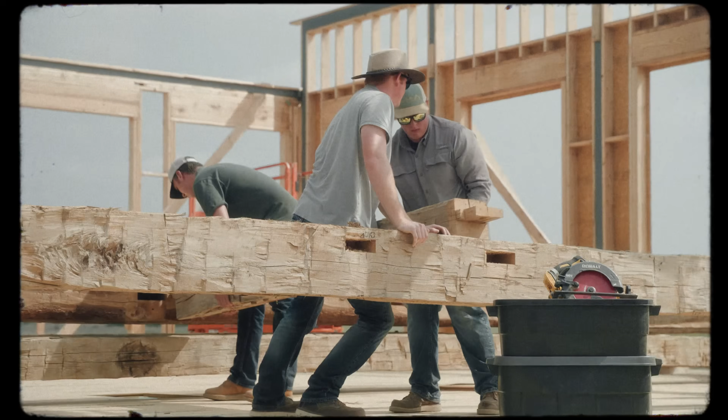Welcome back to New House, Old Soul. We're talking about framing today and the history of how some of these things are put together. Maybe you'll see this on some of your builds, and then how to build quality again today.

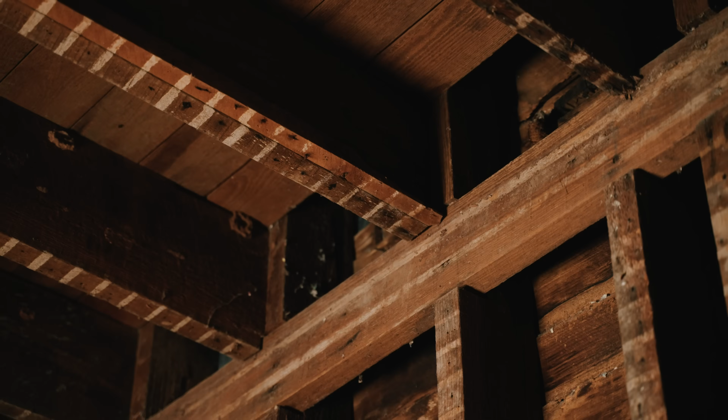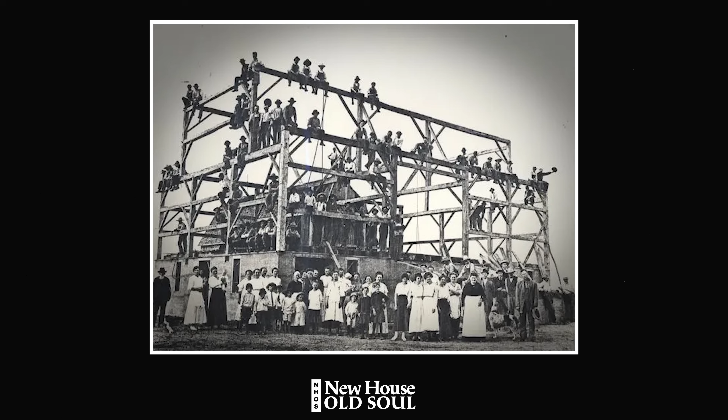Okay, so talking about framing, how to think about it. Essentially, we've got three types of framing. There's the early timber framing, which lasts from the earliest periods in America, 1640 to 1740. I suppose there's one earlier, log cabin, right? A log cabin would be a different type of framing. We actually have both at the barn project, we'll go out and check that out. But timber framing is, let's just say 1700 to 1840.

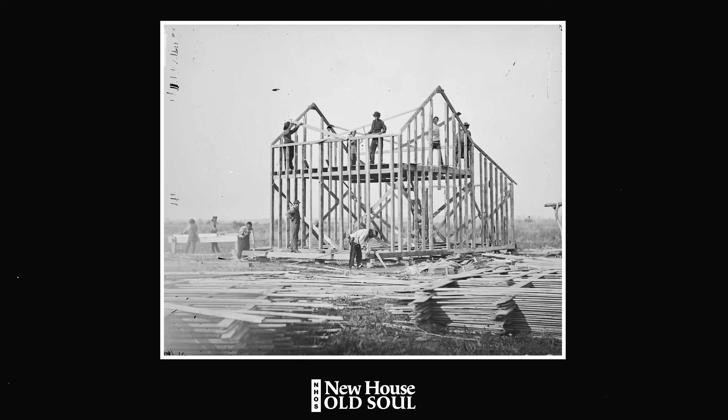Really right around this period of time, 1840, things start to begin to change. The next type of framing is called balloon framing. Balloon framing is from 1840 to 1920, and then you've got Western framing or deck framing, which starts around 1920 to today.

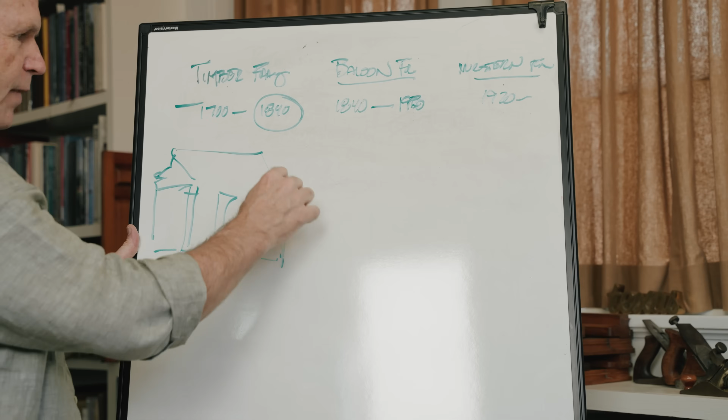So timber framing is essentially, the pieces that are going to hold the house together are large timbers, and they were made into bents. Essentially, you'd make a frame here, and this would be called one bent. You would lean this up and then tie it together with a girt that went across, and these bents would be held together.

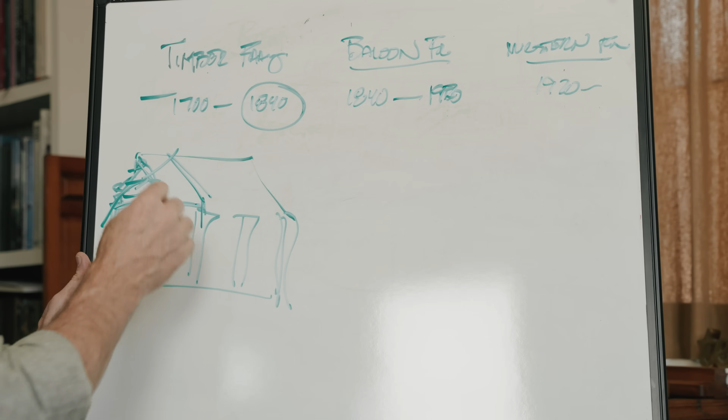And so you saw this when the barn was going up, that they actually built these bents and then craned them into place, and then they tied it together and kind of locked this thing together. But the timbers are probably average 8 by 8, sometimes 10 by 10. There's a massive summer beam out there that's like 20 by 12, it's huge. This is the way timber frame was put together.

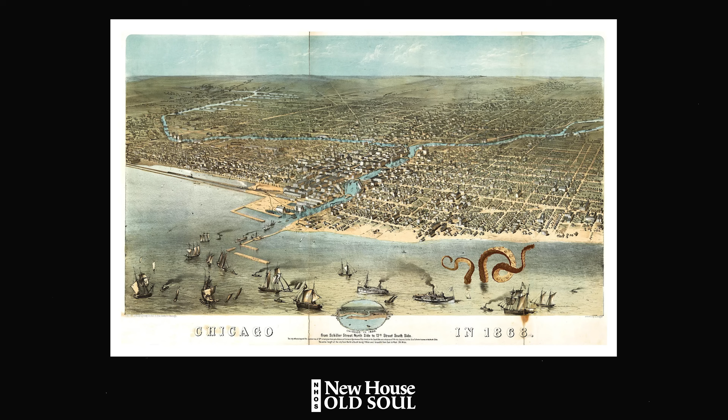As Western expansion took place, as we were growing very fast, the number of timber framers moving west - Chicago was right around this time period, 1800, 1820, 1840. You have the Erie Canal in 1820, 1830, so Chicago's really growing very fast. It's growing so fast, and there's so many immigrants coming in that there's not enough skilled labor to build the timber frames, and so they start to put houses together in a different way.

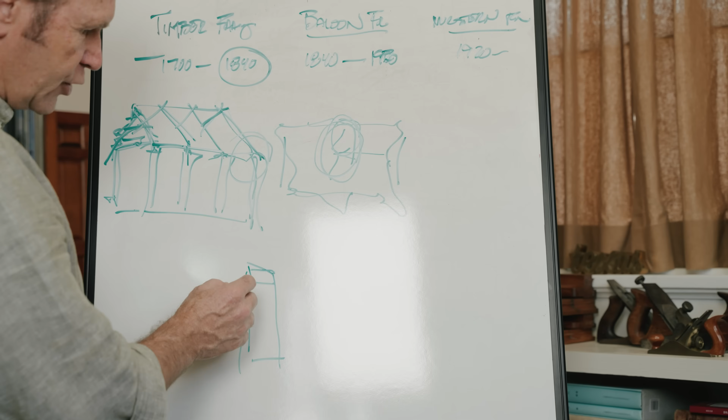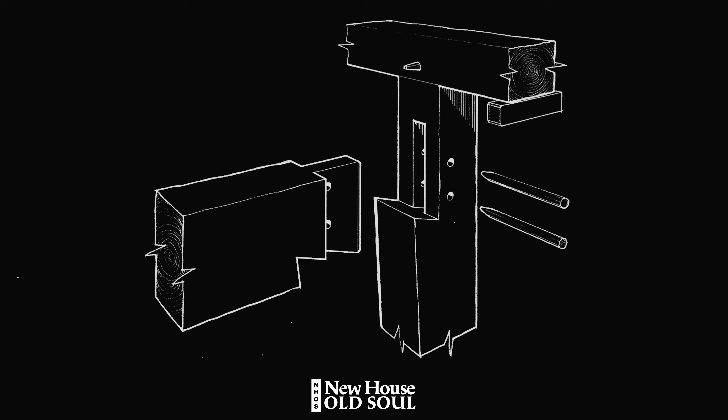If I look at this timber frame, you would have a mortise that goes inside here - the mortise is the inside piece - and then you'd have another piece with a tenon, and the tenon would slide into that mortise, and then it would get pegged. This mortise and tenon joinery for timber framing was almost like building furniture, crafting these houses, and then you'd have a brace that locked everything together. Then when you sheathed the house, it kind of got some structural rigidity.

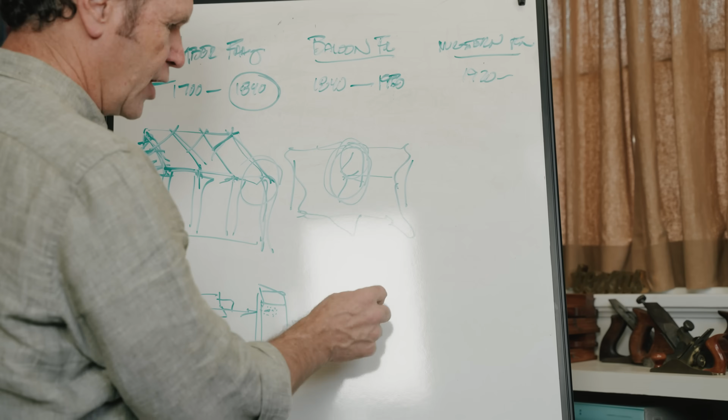In this case, with balloon framing, you're basically taking a stud and a plate and nailing it together. The skill level to do this was much lower, obviously, than building a timber frame. The whole idea of a balloon frame was a derogatory term, meaning it looks like a balloon, it's going to blow away. Out of necessity, it really grows and becomes the dominant form of building.

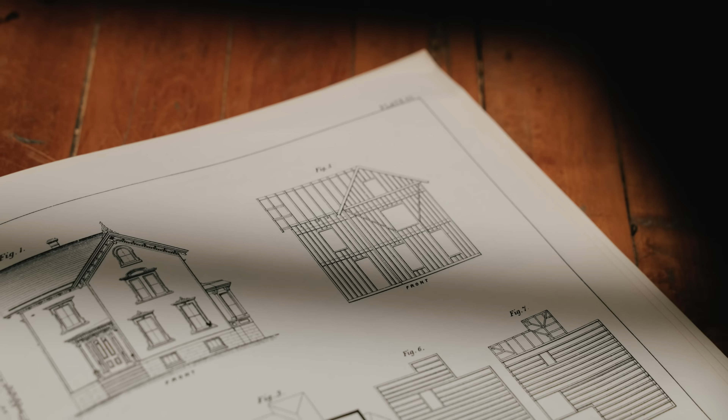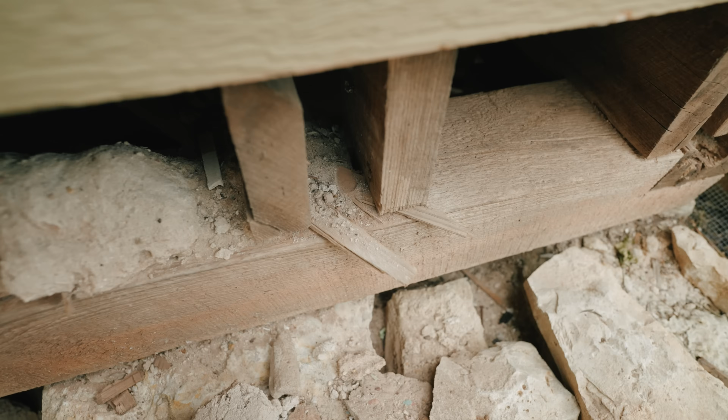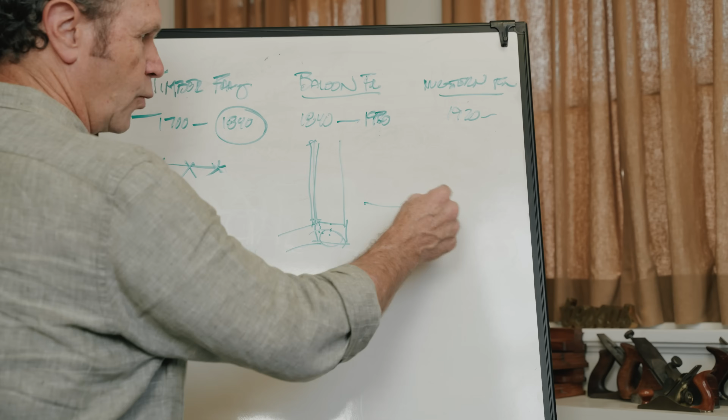Now, if you look at the catalogs for how they were put together, the balloon frame takes a bit of a hybrid from the timber frame, because what you'll see is there's a big timber plate on the bottom, and these studs go down and are actually mortised into that beam. Where did they get that? Why would they mortise into it? Because they come from a timber framing background. So it wasn't a complete 2x4 plate, 2x4 header, and everything nailed together - it evolved over time. By the time we get to Western framing in the 1920s, the big timbered plate at the bottom has kind of gone away.

Sometimes I'll hear people talk about going into an old house and they say there's no headers over the windows and doors. I can't believe these guys built so cheaply and so badly. Well, in truth, that's the way it was planned and that's the way it was laid out.

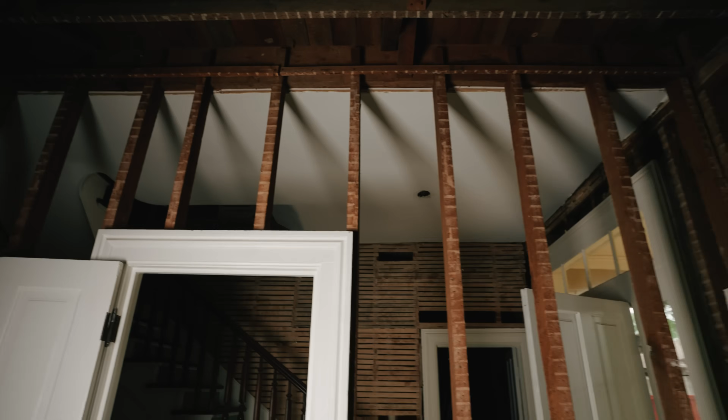If I look at these framing plans, this is an 1870s book, a pattern book from Bicknell and Comstock. Basically what they're showing is this house framed right here, so they're showing the stick framing that's happening. If you zoom in and look, there are no headers over those windows, okay?

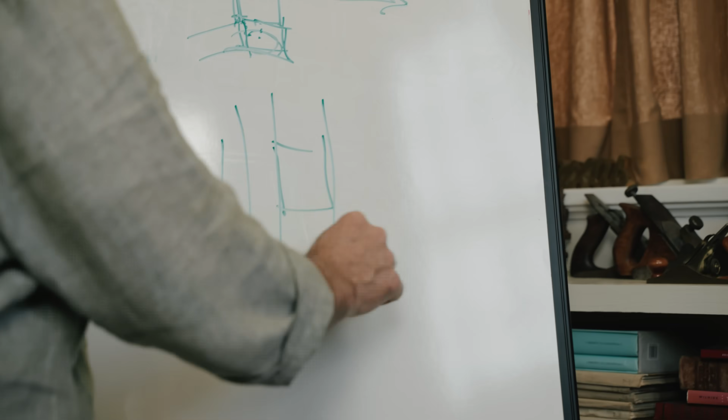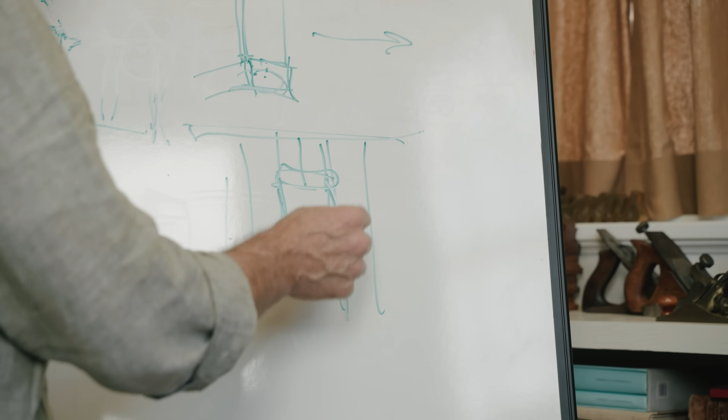And so if I have an opening and everything's stick framed, right? They did not build a header to span this opening. There are no cripples, there's no king studs and jack studs or anything in here. They just ran their studs right across. They stuck a window in that opening and they didn't worry about building any kind of a header like that.

We would do today. When you look at houses and realize they did that, sometimes there's a sag that takes place, especially in bungalows from the 20s, where you get a window that's 6 or 8 feet wide and no header—you actually do get some sags.

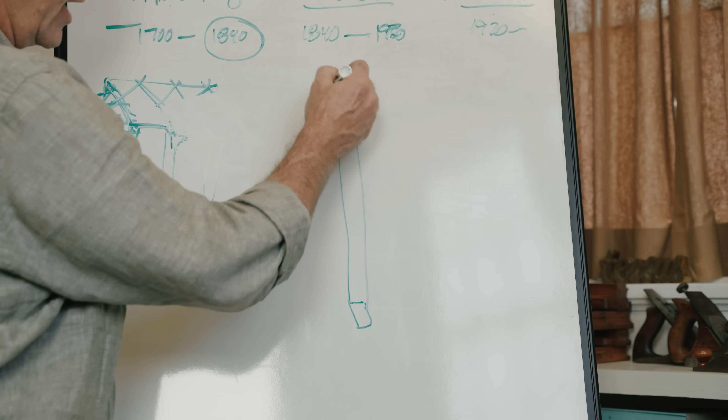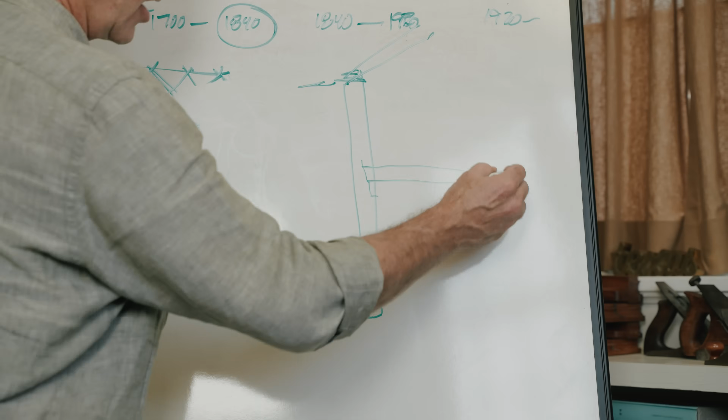How did they hang the first floor? What did they do? They actually put in a ribbon band or a girt that was notched into the wood, and then their floor joists actually sat on top of that ribbon band, okay? They didn't really fall apart, but it does seem precarious the way they kind of locked these houses together.

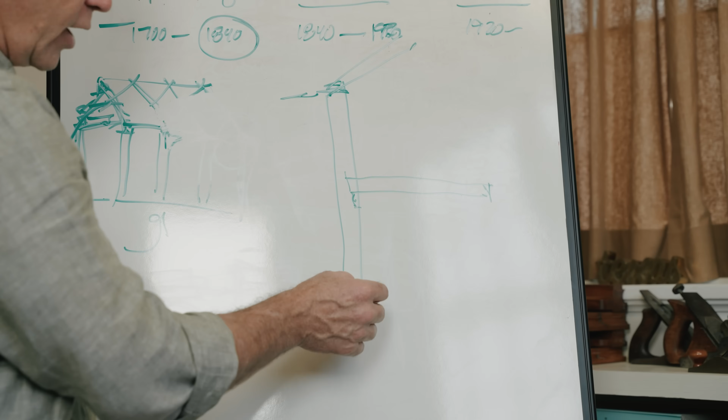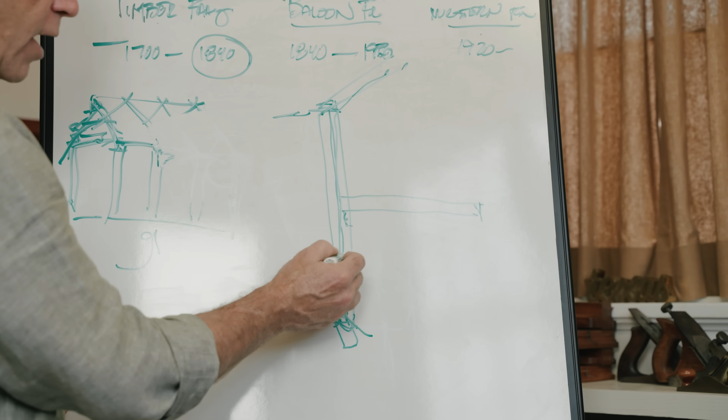The problem is that in this cavity, there's nothing stopping the airflow that goes between here—airflow or fire, right? If there's a fire in the basement, it runs right up the inside of the walls, goes right into the attic, and the house burns down very quick. So the whole idea of putting fire blocking in on these levels, every 6 feet or whatever it was, was to keep fire from running up the walls and burning these houses down so quick.

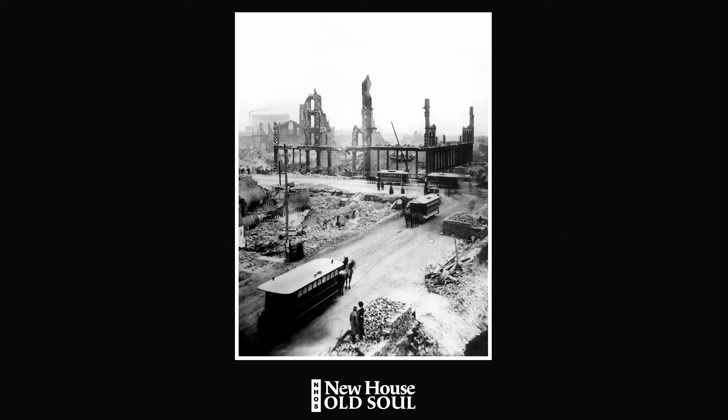Remember the Great Fire of San Francisco, the Great Fire of Chicago—the city went up in flames so fast, part of it was because of no fire blocking and balloon framing. There is another problem with this, and that's the way the wood expands and contracts, but mostly it was fire that was causing the problems and causing the change.

And so again, if you remember our map of the United States, in 1840, 1850, they're discovering balloon framing out here; by 1900, 1920, they're doing Western framing out here. This is because the migration is going west so fast. We've got the frontier out here, so you have a lot more building and a lot more fast construction going on.

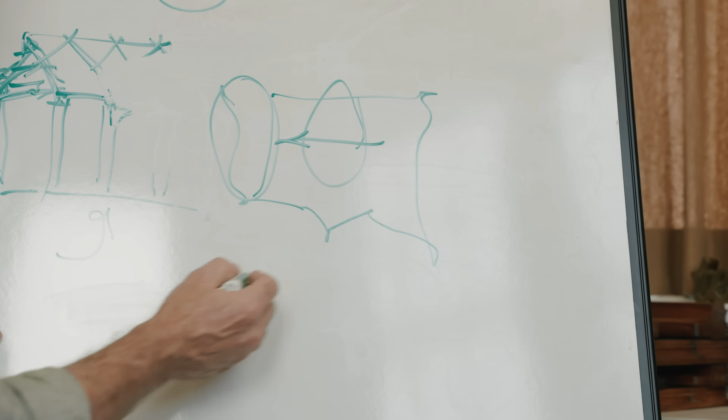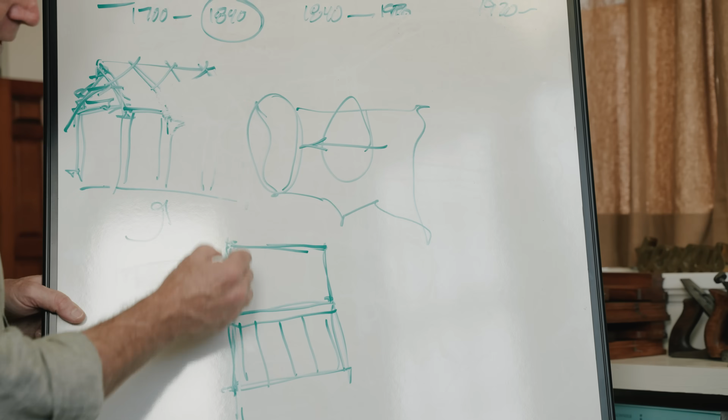And so when you get into Western framing or deck framing, essentially what happens is I do not build a stud that goes all the way up the wall like this. Instead, what I'm doing is building a first floor, putting my joists in, decking it, building my second floor right up on top of that first floor. This is called Western framing when they changed their building methods.

So instead of having floor joists that hang onto that ribbon band, they instead decked this out. That stopped the fire problems, that stopped movement problems, because one of the other problems was the expansion and contraction that balloon framing caused.

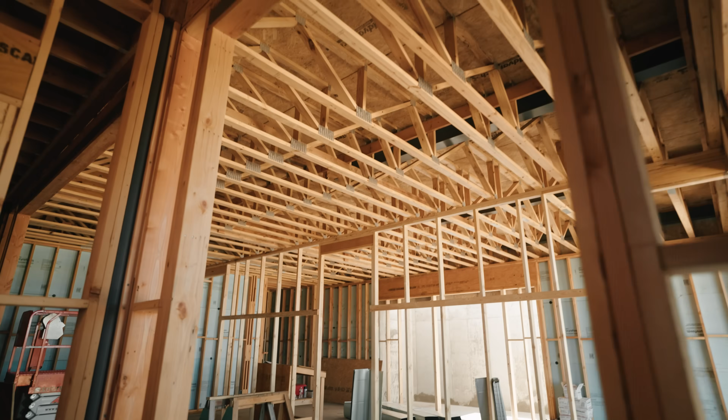So here's your history of framing. We are now in this Western framing world. This is how we build houses today. This is what is code. This is how we got there. If we're going to build a new house with an old soul, what do we do, right?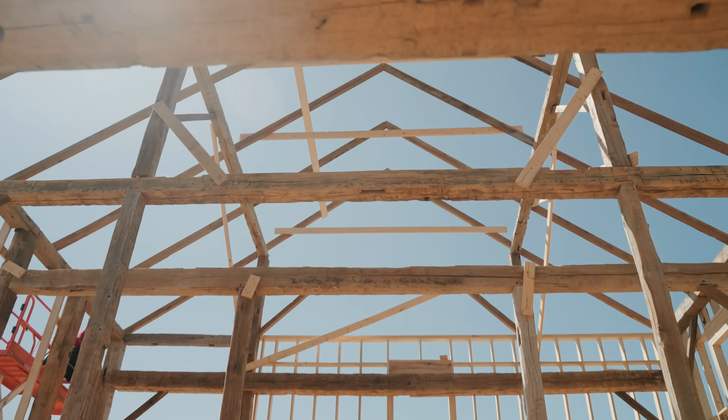Are we taking anything from this balloon framing tradition and applying it to new houses? Not really, but we are taking this timber framing tradition and applying it all the time. There are businesses taking down old barns, restoring them and putting them back together. We've got a project going just like that. I want to take you out there and show you the magic of these old timber frames, why they're so fun to live in, and why they take us back to a different place in time. This project has a log cabin, some timber frame, and some new framing—a great project with a lot of history and old soul things applied to this new house.

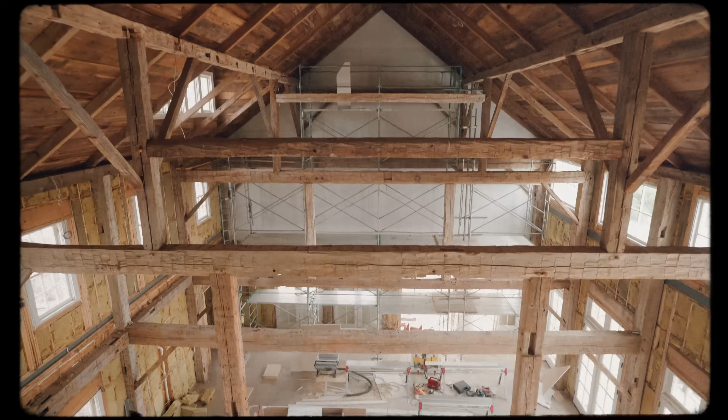How do you get a new house with an old soul? Part of it is taking that story and the narrative of framing, especially log cabin and timber framing, because those huge timbers are things we're not used to seeing. They evoke an age, they evoke a story, a narrative that we keep talking about. It's like, ooh, when did that happen? What's the story behind that? Why did they do that? Why is that there?

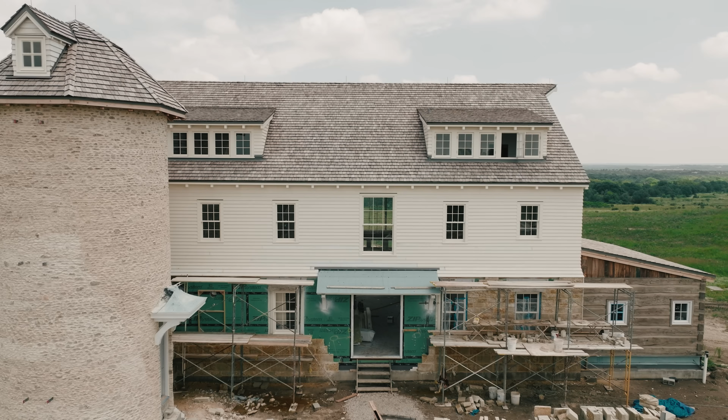So this cabin, right? We've got two stories here. We've actually built a log cabin—there wasn't an original one. We've fabricated this story, where originally there's a barn, or the first structure on this property was a log cabin. Later it got added a timber frame, which is what's inside. That's the story and the background of this house. So when you drive up, you see the silo, you see the framing, and immediately you go, where am I? What's going on? What's the story behind this?

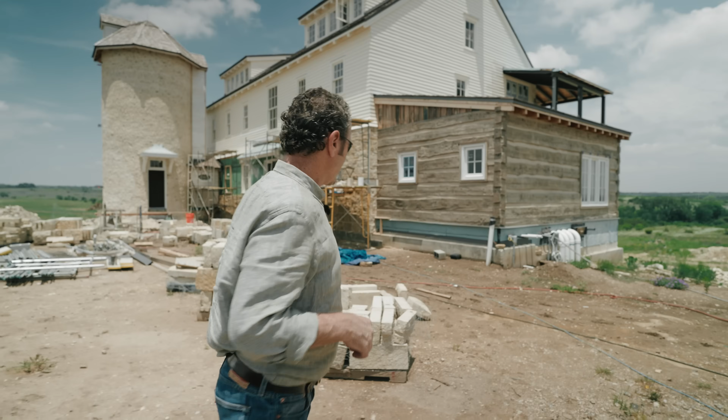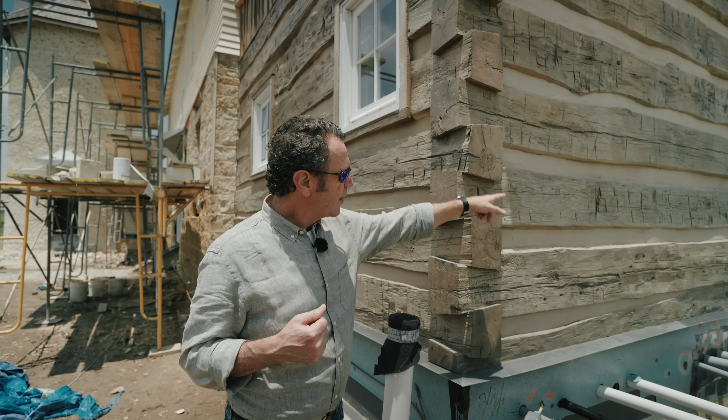So the earliest type of framing is, of course, log cabin framing. Now when you get into log cabin framing, are you just going to stick logs on top of each other? No, we're actually using historic building techniques and historic timbers to evoke the right feel and the right age. These are antique timbers, okay? So the antique gives us the hand-hewn marks—we see the axe marks, we see the age right there of how these were made.

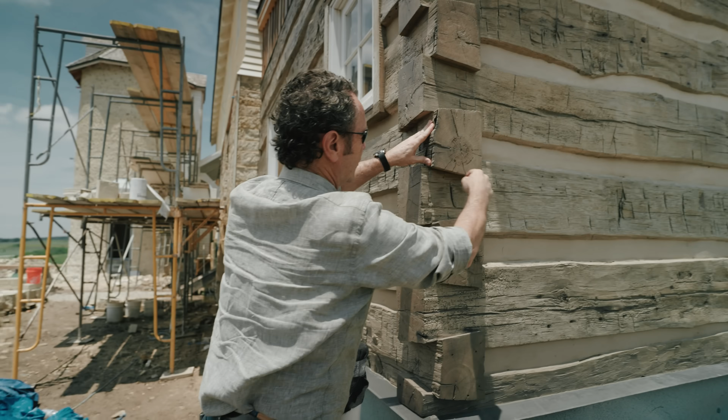This is a dovetailed corner. You can see each of these is a dovetail—it's bigger on this end than it is on this end. It keeps it from pulling away, right? That locks it in. This timber is locked in between these two. That dovetailed corner, the reason they did that is so it didn't fall apart. The roof naturally puts weight on it, and it would want to push things out. The dovetail corner stops that.

The great thing about antique timber is that it lasts so long. We've got really tight growth rings, we've got a lot of heartwood, so we've got timbers that not only look really cool but will last a long time. The next stage after log cabin is timber framing. Let's go inside and I'll show you that timber frame barn.

This is timbers, right? It's called timber framing because it's framed from timbers. The bents I was talking about—this comes in sections. There's a bent section, here's a bent section. This whole roof and triangle and everything are all pegged together. You can see the large pegs and the mortise, which shows you there's true mortise and tenon joinery, the way this is all locked together.

So essentially what happened, the way this barn was put together—it was dismantled in New York, taken down. They would have taken out all the mortise and tenons, pulled all the things, documented it, marked each little piece with a map. They would have drawn out on a plan, hey, this is where this number goes, this is where this board goes, this is where this board goes. So the whole thing would have been documented and taken down.

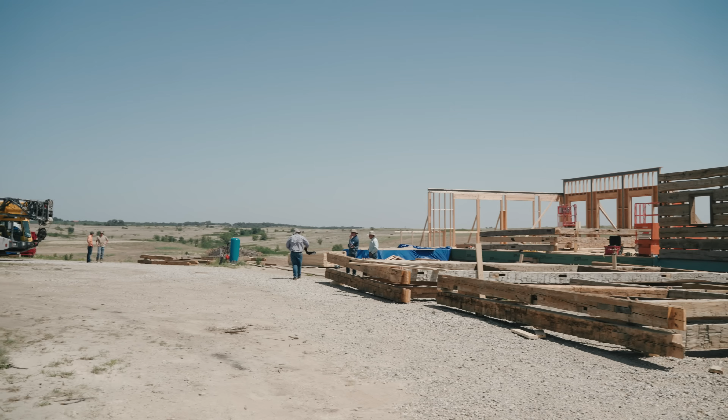It was actually taken to Montana, where this company has a huge yard, and they reassemble and rebuild these things. If one of these beams was rotted or something happened to it, they would replace it. So they essentially reconstruct this thing, put it on a truck, drive it down here, and they actually picked it up with a crane.

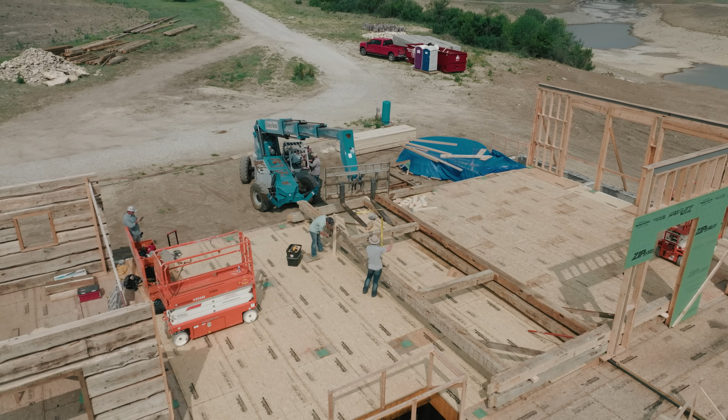So they prebuilt these bents, pick them up with the crane, and come and drop them in place. We already had our foundation, our base ready for them to come set it down, and then these cross pieces are the ones that tie it together. They bring a big bent in, and then lock it together with these girt pieces that come and tie it across. You can see the bracing, you can see all these pieces as it's all tied together.

So we start at one end, the bents are all laid up, and then it's all put together. It can be put together in about a day, so it's pretty quick.

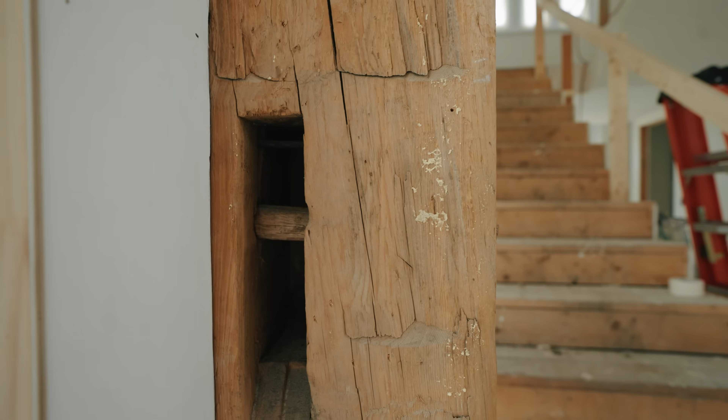This is that massive beam I was talking about. It's called a summer beam. There's a hole in it as if this was part of a mill or something that was spinning, something that was going on in here. Look at this right here — here's my mortise, the tenon fits in here. I've got an old peg that's still sitting inside there. So here's our joinery coming together.

So now we are using the past, using a historic piece of fabric to communicate a story and a narrative. We're using framing to help create that story, to help us tell that story.

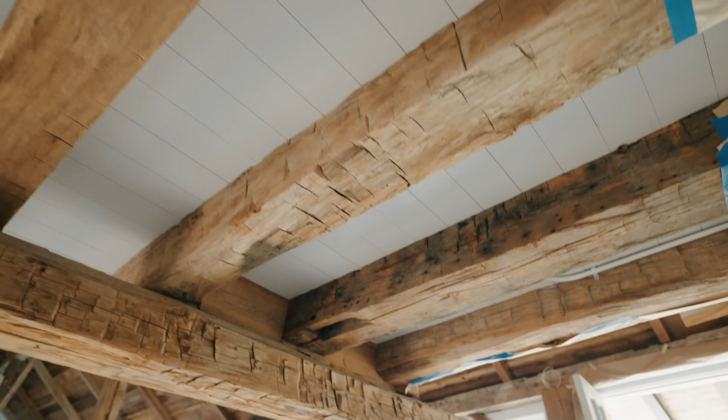That's how we take this new house with an old soul. But what do you do about modern framing? What do you do about new framing? Obviously, we have framed this up with standard lumber.

So what are we thinking, what's going on? You can see over the door that there's a door header over top of that door opening. How do you put this together? We are not timber framing our houses anymore — now, you can, right, but just for ease and everything else, cost, it's better to go with conventional lumber.

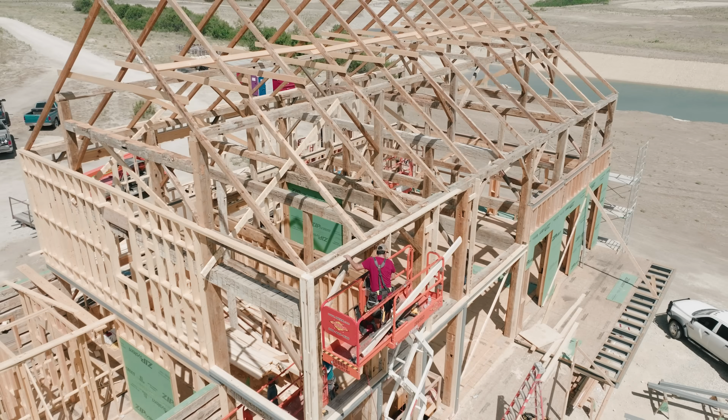But remember, conventional lumber these days can be really cheap. Did you know that about 10 years ago, the Southern Yellow Pine Association basically had to change their span charts, because Southern Yellow Pine was no longer as strong as it used to be?

What's that about? Basically, the size of ceiling joists, or the size of joists you put into a floor, is determined by a span chart. It's an engineered chart that makes sure you don't overspan an opening, so that your 2x8 is properly able to support the weight that's over top of it. That span chart started changing, so the 2x8 would no longer span as long an opening as it used to.

So what was going on? Well, just like with woodworking, when we're building our 100-year window, we build it with great wood because we know 90% of the reason those historic windows lasted so long was the wood quality was so good. The same thing that happened with old growth yellow pine, oak, and all the old virgin growth timbers has happened to the building industry and the framing industry.

So we think it's really important to get good quality lumber. Just because you can't see it behind here doesn't mean you shouldn't have good quality. We're often talking to people about using #1 yellow pine versus #2. What's the difference? #1 will have less defects — there'll be less wane, and the size of the knots changes.

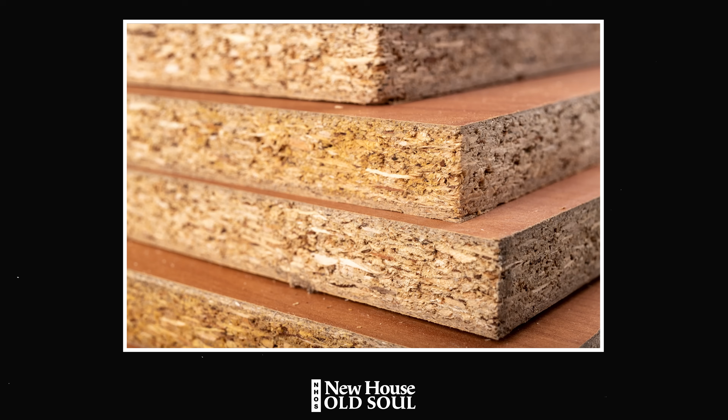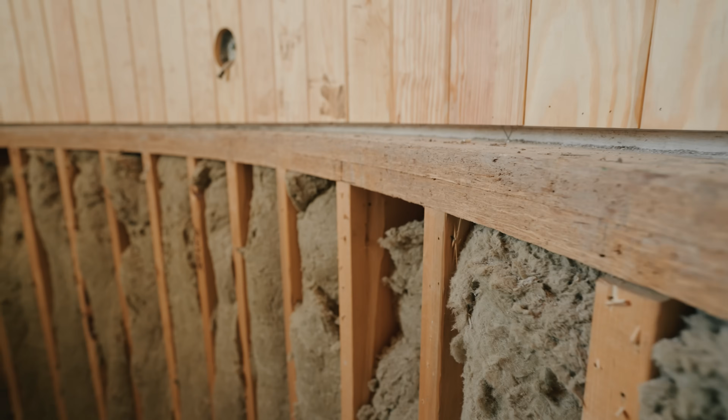So when we want walls to be very straight, when we've got very tall walls, we'll often frame those long, tall walls with LSLs — laminated strand lumber, which is an engineered lumber. Look at this top plate right here — it's made with LSLs, a strand lumber. This top board here is an engineered piece of wood, called Advantech, which is what we're using.

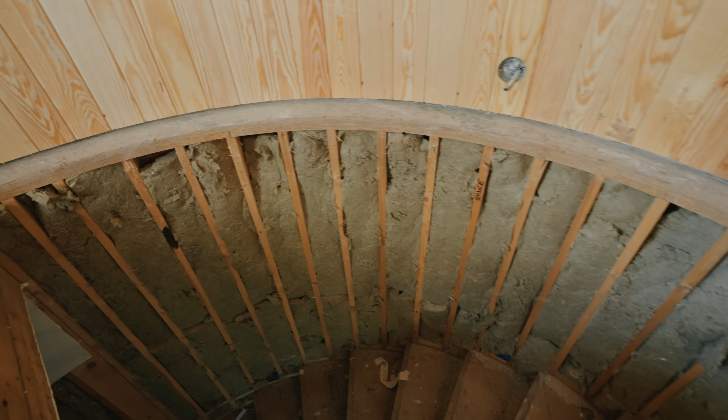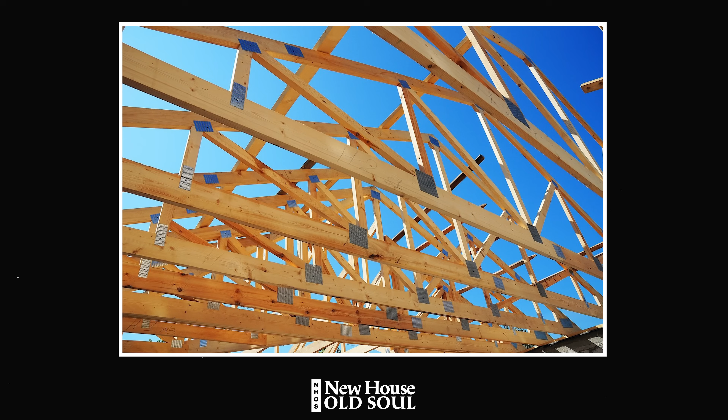After you've built the walls, you've got a flat deck. Now you're going to put the roof on. How do you do that? Well, one way is to get engineered trusses, roof truss systems that come pre-made. They come on an 18-wheeler and they crane them into place, much like we craned our bents in. Why do they do that? Because it's cheaper and faster to build it that way.

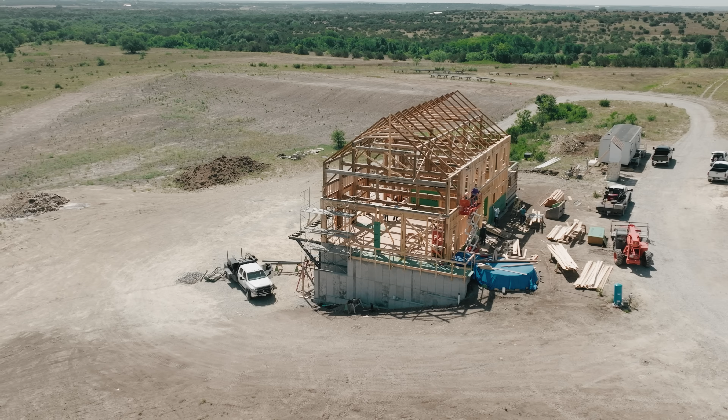The most difficult part of framing is a roof system because there is a lot of geometry that goes into your joist, where it needs to be braced, how you cut in the bird's mouth, how you cut this angle at the ridge. All of those things require skill, require craftsmanship, and it's a much cheaper and faster way to use a truss. You don't have to have as skilled a craftsman to set a roof truss system as you do to stick build it. Stick building it, you have someone laying it all out on the job site. With a truss system, it comes from a factory that way, and you just put it up. We would advocate for a stick-built system because we think we get better quality that way. Quality is still at a premium for that new house, old soul.

So one of the other tricks people do is they'll just take timbers like this and put them in the ceiling, as if it's been old timber framed. That's a good way to do it. That's a start to it. But when you see the way it's historically been put together, sometimes those things can look like a cliche. They can look forced. And so part of the reason why I study the past and look at the past is I want to be able to build with authenticity.

Sometimes those beams in the ceilings end up getting too far apart, and all of a sudden they're 4 or 6 feet apart, and it looks like they just tacked some old timbers in the ceiling, as opposed to looking like the house had an original flooring structure that was put together. If you watch my video on timbered ceilings, I talk about layering, that you have big beams and intermediary beams and small beams, flooring, right? Because those were the ceilings and then the floors of the upstairs. And the further you get into it, the better your story is going to be.